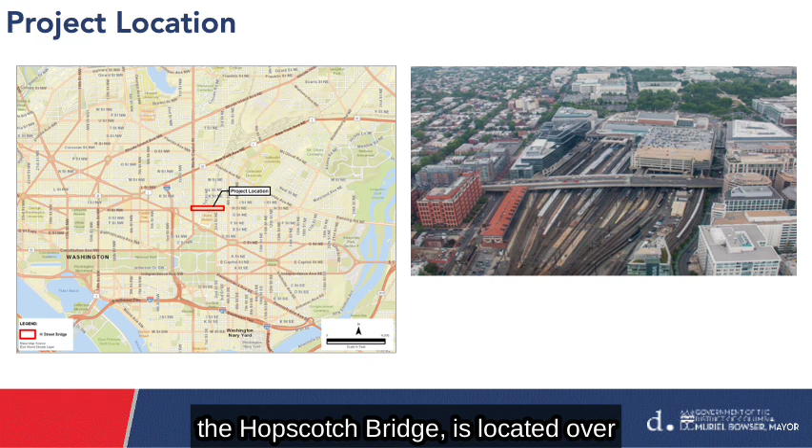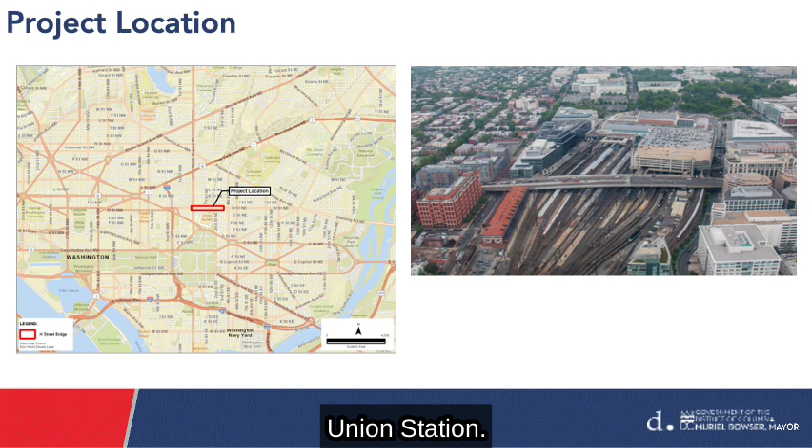The H Street Bridge Northeast, also known as the Hopscotch Bridge, is located over the Amtrak rail yard just north of Washington Union Station. You can see the location of the bridge on the map to the left, indicated by the red rectangle. The picture on the right shows the bridge looking south towards Union Station. The bridge provides a connection between North Capitol Street and 3rd Street Northeast in the District of Columbia. The western approach to the bridge is flanked by office buildings, whilst to the east there are some office buildings, but the area is primarily residential.

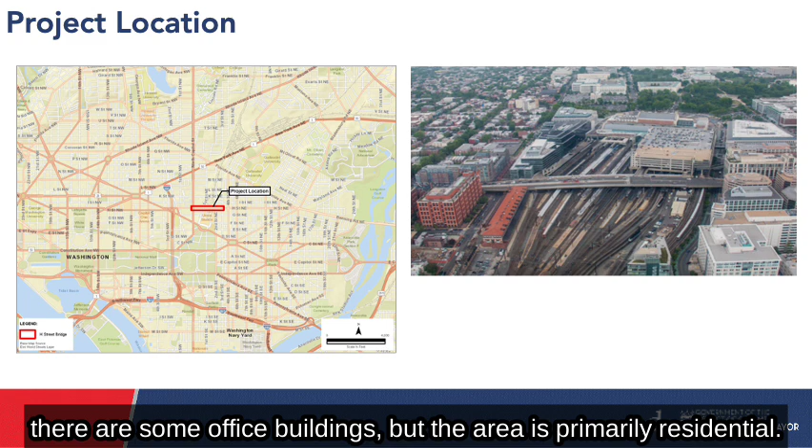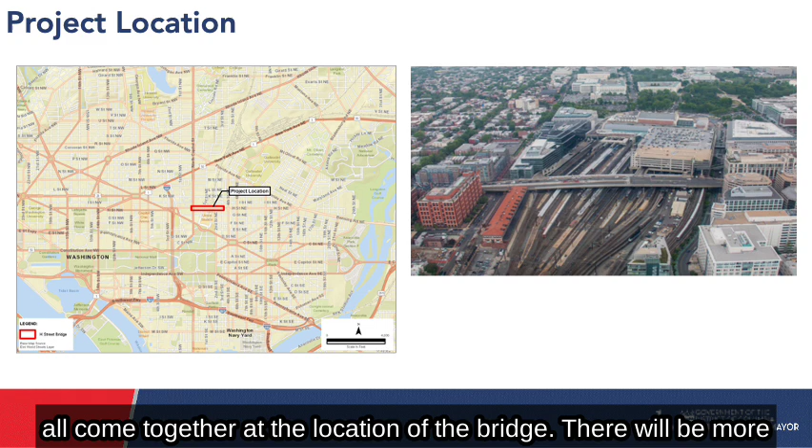Some of the adjacent buildings are located just a few feet from the edge of the bridge. Multiple forms of transportation, including rail, bus, streetcar, taxi, and private vehicles, all come together at the location of the bridge. There will be more details on that later on in this presentation.

Let's step back a bit to review the history of the bridge. Originally, H Street Northeast was a road that provided an east-west connection that linked North Capitol Street, 1st Street Northeast, Delaware Avenue, 2nd Street Northeast, and 3rd Street Northeast in a neighborhood known as Swampoodle.

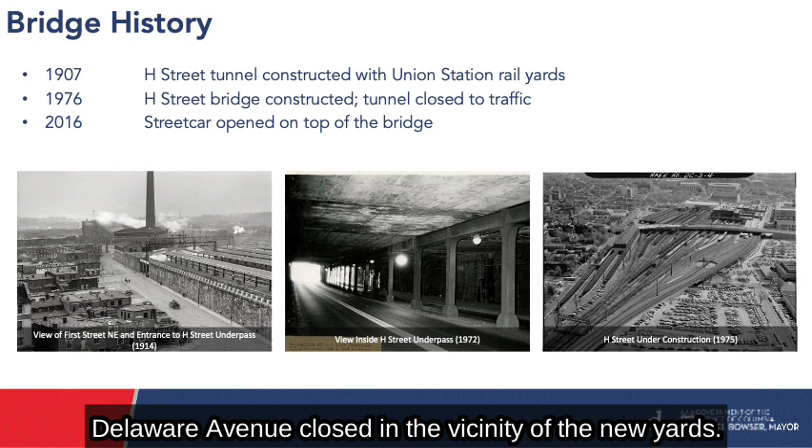In 1907, Union Station and its associated rail yards were opened. H Street Northeast was moved to a 750-foot-long underpass or tunnel beneath the rail yards. 1st Street Northeast was realigned to the west of the new rail yards, and Delaware Avenue closed in the vicinity of the new yards.

The H Street underpass remained in service until the 1970s, when due to the deteriorating condition of the structure, it was determined necessary to rebuild the connection. Ultimately, it was decided to replace the underpass with a new overpass structure that would connect North Capitol Street and 3rd Street Northeast and provide a link to the new parking garage that was under construction over the rail yard at that time. The opening of the new overpass coincided with the bicentennial celebration in 1976.

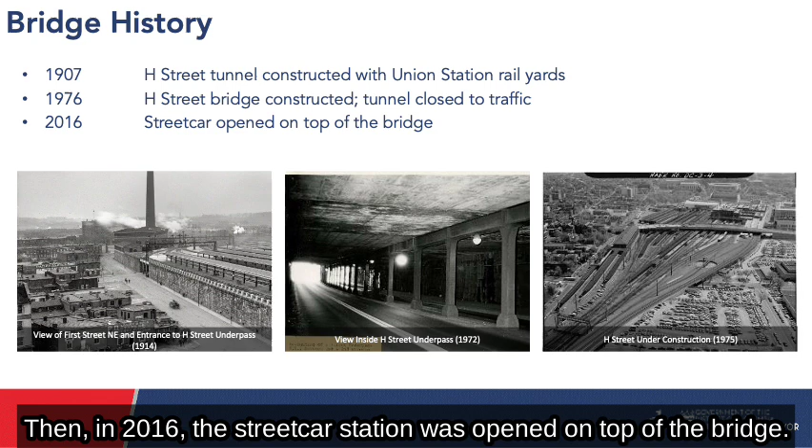Then in 2016, the streetcar station was opened on top of the bridge.

As part of the new project and the preparation of the NEPA document, a purpose and need statement is prepared. The purpose of the project is to replace the H Street Bridge Northeast and accommodate the modernization of Washington Union Station proposed by the Union Station Redevelopment Corporation and the adjacent Burnham Place commercial and residential development proposed by Akridge.

The H Street Bridge Northeast needs to be replaced to address structural deficiencies, maintain modal relationships, and support the economic development within and adjacent to the Washington Union Station. The purpose and need is included in Chapter 1 of the Environmental Assessment.

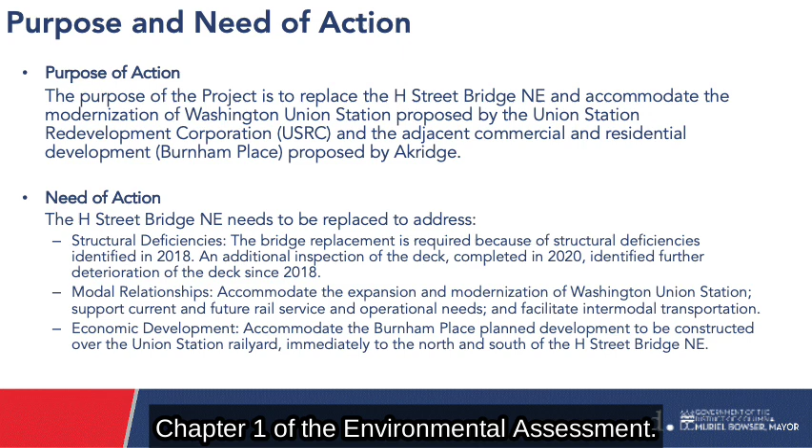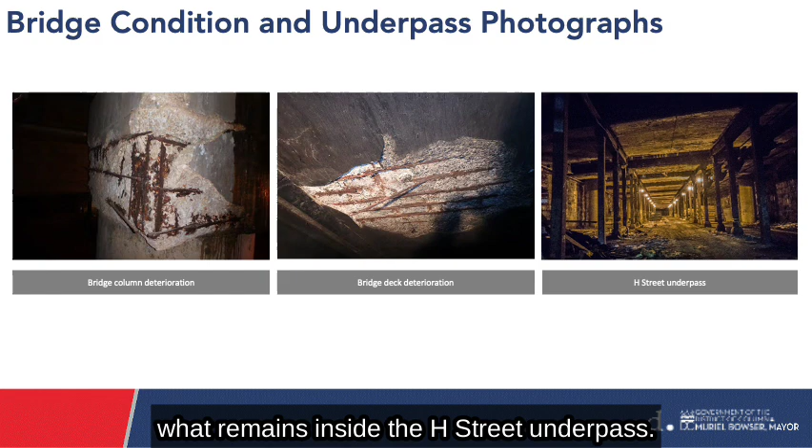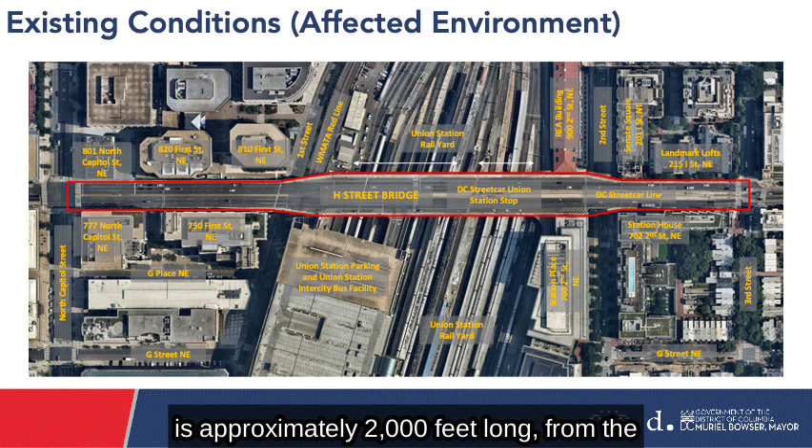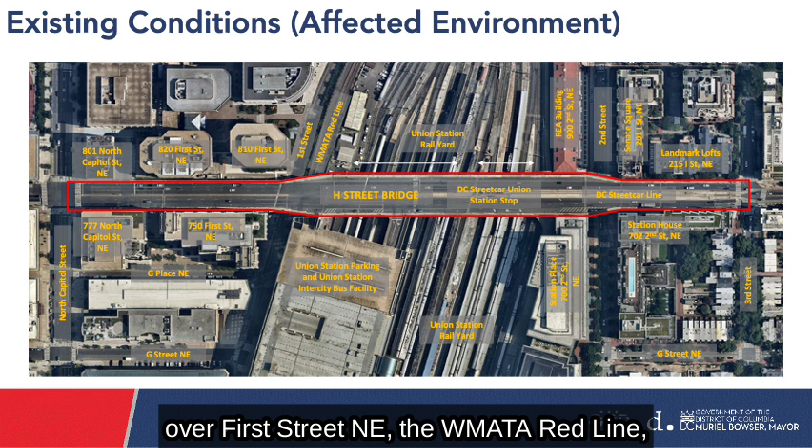Central to the corridor is a 1,442-foot long bridge over First Street Northeast, the WMATA Red Line, the Amtrak Rail Yard, and 2nd Street Northeast.

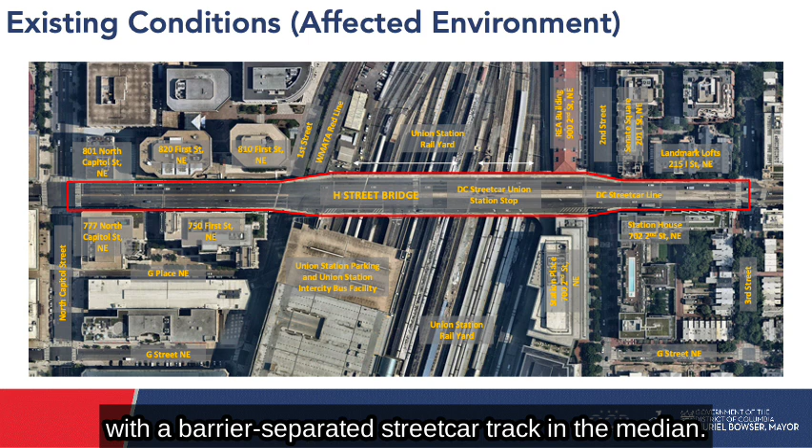H Street carries 3 lanes of traffic in each direction from North Capitol Street to the top of the bridge. To the east, it carries 2 lanes of traffic in each direction, with a barrier-separated streetcar track in the median. It widens to 8 lanes in the center of the bridge to include a right-side bus auxiliary lane westbound, a center turn lane westbound to the Union Station parking garage, and a right turn lane eastbound. 2 bus stops and a streetcar station are located on top of the bridge.

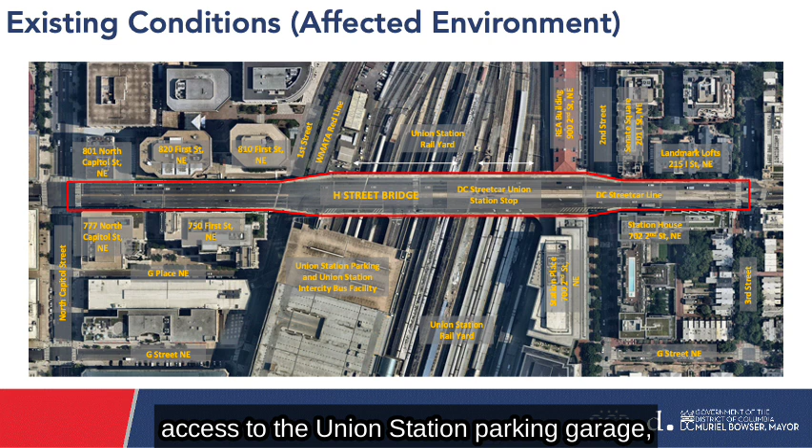There is a continuous sidewalk on both sides of the bridge. The bridge provides vehicular and pedestrian access to the Union Station parking garage, the Union Station intercity bus facility, and the station place and Union Station loading docks.

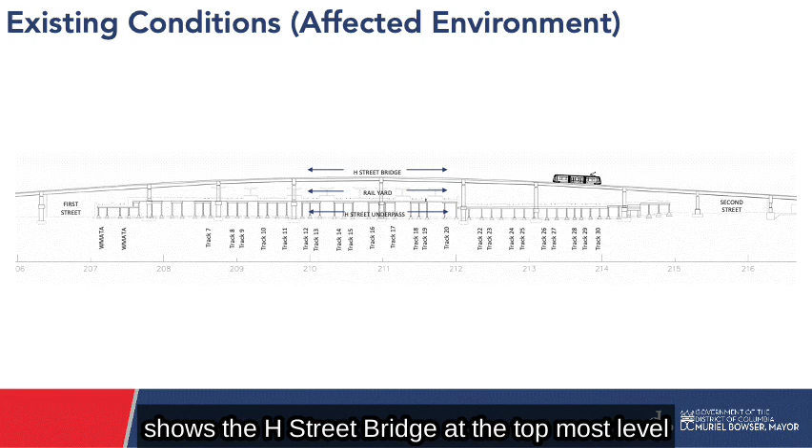This sectional drawing along the length of the bridge shows the H Street Bridge at the topmost level with its relatively steep approaches that allow it to rise over the rail yard. Below the rail yard is the H Street underpass. The underpass is similar to K Street, L Street, M Street, and Florida Avenue to the north, with its multiple steel columns supporting the rail tracks above.

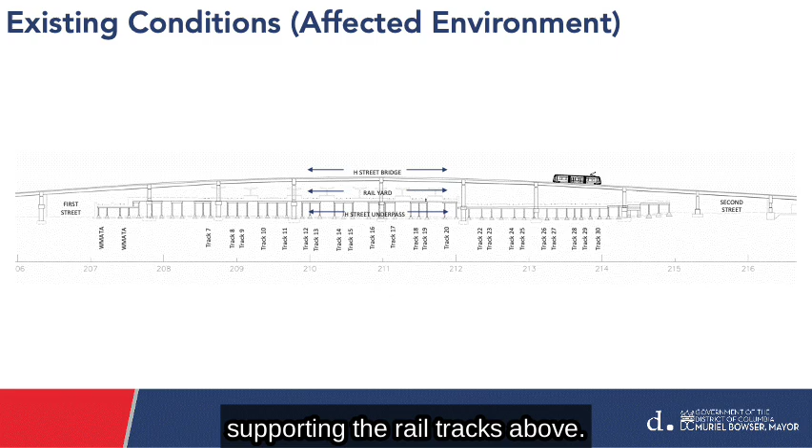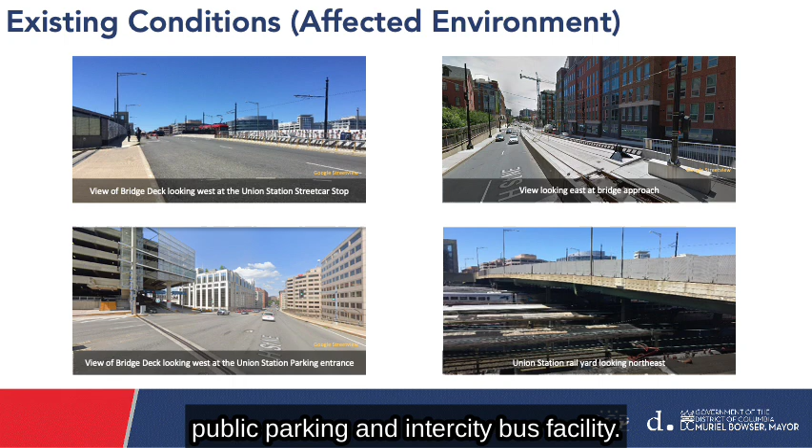Due to the constrained urban environment and future developments envisioned for this part of Washington, D.C., the project team has coordinated with multiple key stakeholders throughout the preparation of this environmental assessment. Amtrak owns and operates the tracks and platforms beneath the bridge, and also owns the REA building on the east side of the rail yard.

The DC State Historic Preservation Office notes that the H Street Bridge Northeast spans the Washington Union Station historic site. DDOT and DC streetcar staff have streetcar tracks and a platform located on the bridge. The Federal Railroad Administration is the lead federal agency for the Union Station expansion project.

The Union Station Redevelopment Corporation manages Union Station and is one of the proponents involved in the plans for the Union Station expansion project. Akridge, a private developer and owner of the air rights above the Union Station rail yard both north and south of the bridge, is planning the Burnham Place development for this space.

The Washington Metropolitan Area Transit Authority, or WMATA, has its two Red Line tracks running beneath the bridge. There are ten properties directly adjacent to the bridge with whom the project has coordinated. Additionally, the community that lives, works, and transits throughout the project corridor is represented by ANC 6C.

The project alternatives evaluated in the environmental assessment include a no-build alternative and a build alternative. Development of the build alternative occurred through coordination with many project stakeholders to understand project constraints. Certain aspects of each alternative were kept the same.

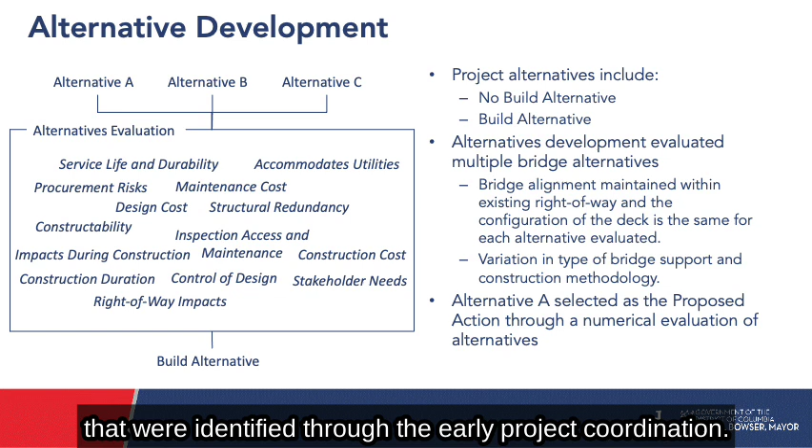For example, the new bridge would be constructed within existing right-of-way, and the street configuration on top of the bridge would be the same. Variation between the concepts was in the location and type of bridge supports and construction methodology. Ultimately, the build alternative was selected through an evaluation that weighed multiple factors identified through early project coordination. The alternatives are described in Chapter 2 of the environmental assessment.

For the no-build alternative, there will be no changes to the existing H Street Bridge Northeast. The existing fracture-critical bridge would remain, requiring continual, frequent inspections and maintenance activities by DDOT. Because the bridge is reaching the end of its expected lifespan, it would require rehabilitation or replacement in the near future. The no-build alternative is retained as a baseline against which to measure the effects of the proposed build alternative.

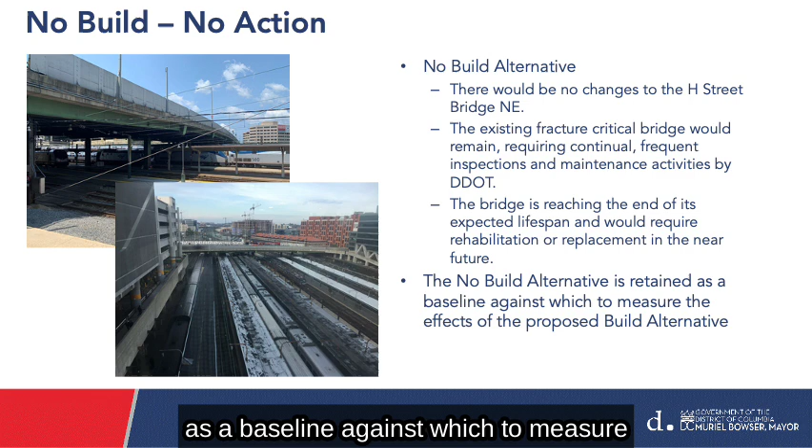In the following slides, we will present certain key aspects of the build alternative, including how it addresses the project purpose and need. The bridge will be constructed entirely within existing public right-of-way and will not require acquisition of any permanent property rights. Various property agreements will be required with adjacent properties during the construction phase of the project to access their property.

During construction, traffic will be maintained across the bridge and to adjacent properties, except for limited off-peak closures to allow some safety-critical construction activities.

The proposed bridge will be compatible with the existing Amtrak platforms and tracks beneath it. It will also be compatible with the layout of tracks and platforms proposed for the Union Station expansion project. Lastly, the layout of the bridge will accommodate the future new intersection proposed for the Burnham Place development planned for the air rights north and south of the bridge.

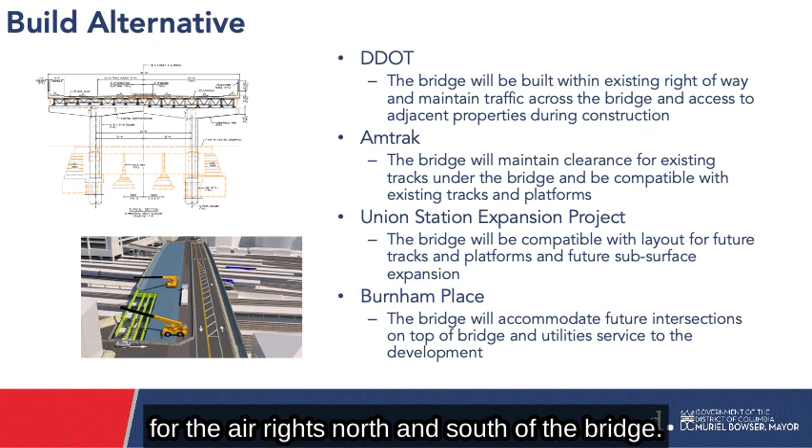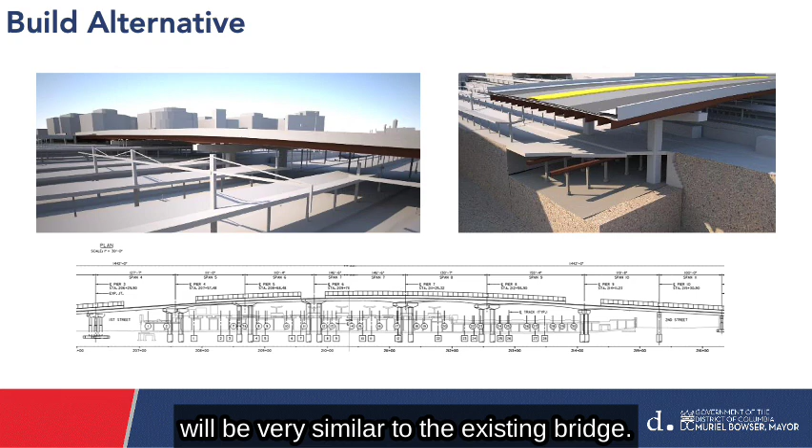This slide shows images of the bridge as it will look once it is constructed. Once complete, the bridge appearance will be very similar to the existing bridge. It will have a concrete deck supported on steel girders. New concrete bridge piers will be constructed within the limited available space within the rail yard and extend through the H Street underpass below. Much of the foundation construction work will therefore be completed from within the underpass.

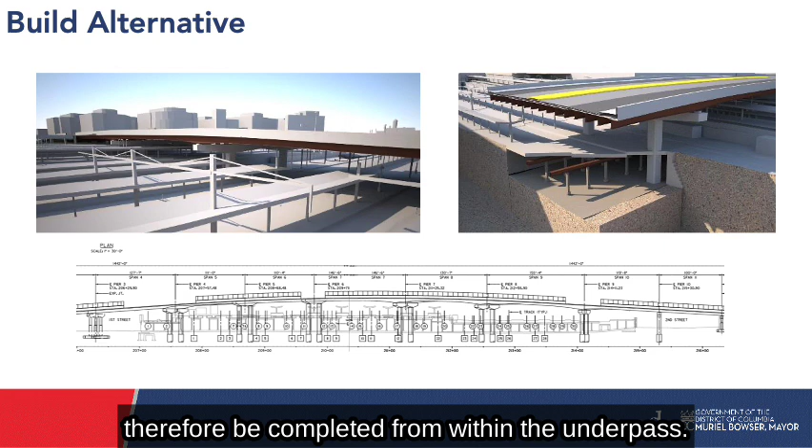The streetcar station stop will be reconstructed a few hundred feet to the west to move it closer to the pedestrian walkway into Union Station. The single streetcar track on the bridge will be replaced by a pair of parallel tracks that will allow for significant improvement in the streetcar operations.

The layout of streetcar track and platform will accommodate existing intersections and future intersections proposed by the Union Station expansion project and Burnham Place. The Hopscotch Kids mosaic panels will need to be removed from the existing bridge before it is demolished.

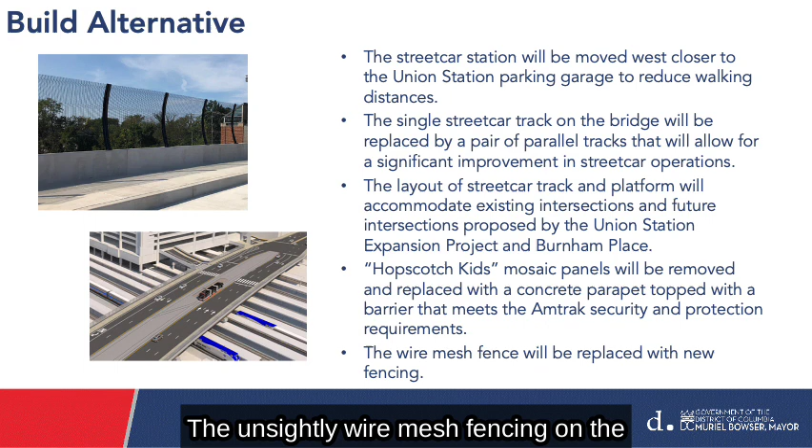A portion of the undamaged tiles will be remade on new boards for display at another location. The unsightly wire mesh fencing on the east and west approaches to the bridge will be removed and replaced by new, more aesthetic fencing panels.

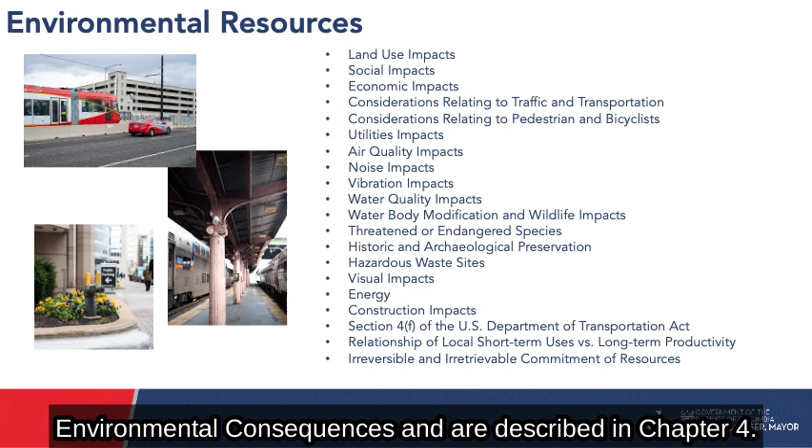Then the impacts from the construction of the new bridge are described. These impacts are called the environmental consequences and are described in Chapter 4.

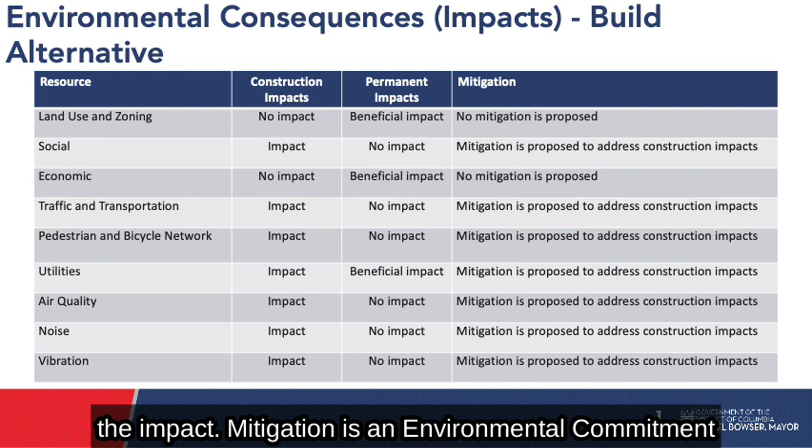These next two slides include a table that describes the environmental consequences, or impacts, based on the construction of the project. In the table, each resource is listed in the first column. Then the construction impact or permanent impact is described. Impacts to the resource may not occur, or may be beneficial or negative, on the natural or human environment. The last column describes if mitigation is proposed to reduce the impact. Mitigation is an environmental commitment which is required to be implemented for the project.

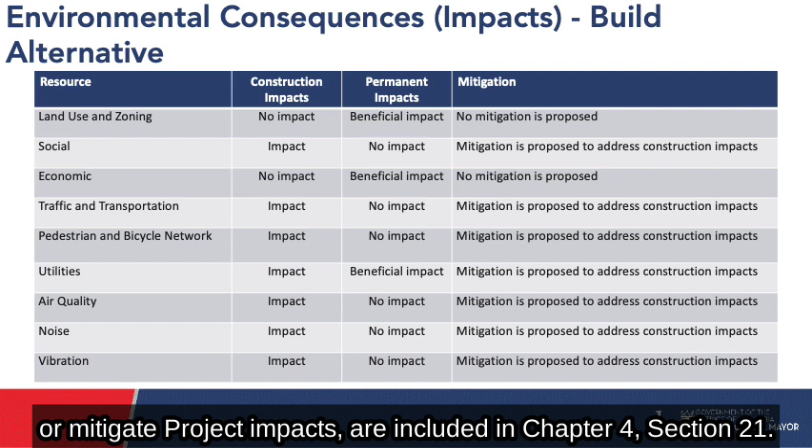Overall, negative impacts will occur during construction due to the disruption of activity. Beneficial impacts will be provided with the completion of the project. Additional detail on this information is included in Chapter 4 of the Environmental Assessment. Environmental commitments, which will be implemented to avoid, reduce, or mitigate project impacts, are included in Chapter 4, Section 21. Please take a moment to review these two slides.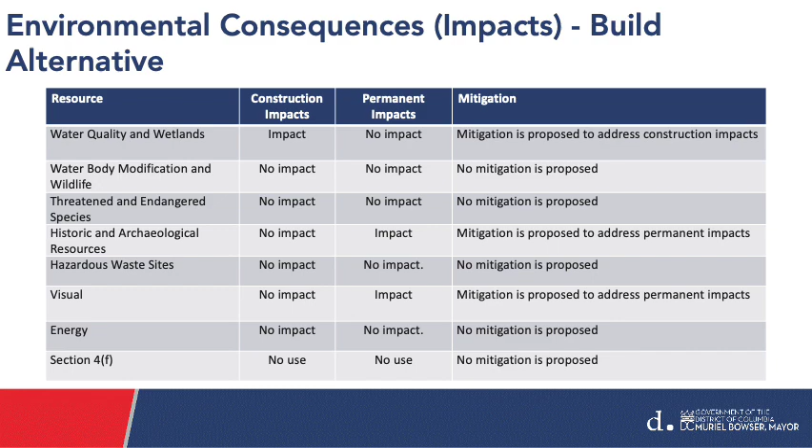NEPA also requires several other evaluations and consultations to be performed in accordance with other environmental regulations. These include Section 4(f) of the U.S. Department of Transportation Act of 1966, which requires the U.S. DOT to carefully evaluate any use of lands from parks, historic properties, or wildlife refuges.

Section 106 of the National Historic Preservation Act requires consultation with the State Historic Preservation Office for any action that could affect resources listed on the National Register of Historic Places. The existing H Street Bridge Northeast is located over the Washington Union Station rail yard, which is a historic site eligible for listing in the National Register of Historic Places. The project is also adjacent to two other historic properties.

FHWA and DDOT will enter into a Memorandum of Agreement with the State Historic Preservation Office and the National Railroad Passenger Corporation, which prescribes protection of historic resources in the project area. A copy of the draft MOA is presented in Appendix D of the Environmental Assessment.

And finally, Section 7 of the Endangered Species Act, which requires protection of any threatened or endangered plant or animal species that may be found in the project area. As a result of this review for the project, no threatened or endangered plant or animal species was determined to occur, and no further studies are required. The results of each of these evaluations and consultations are presented in the environmental assessment.

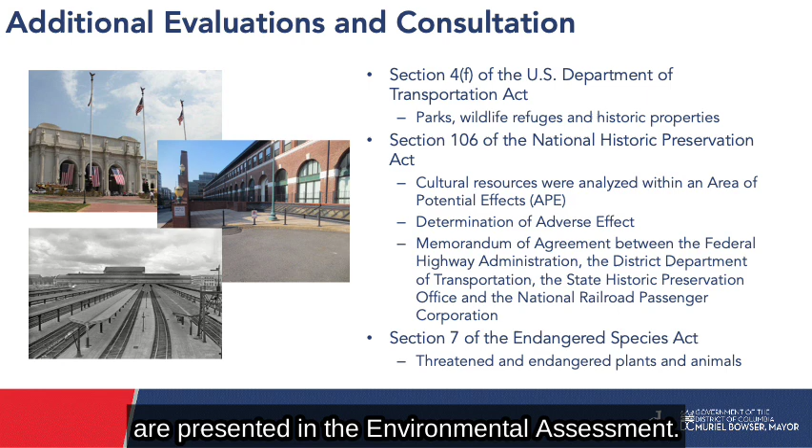This slide presentation is intended to provide you with information on the project and a summary of the findings contained in the environmental assessment. A digital copy of the complete environmental document is available on this project website.